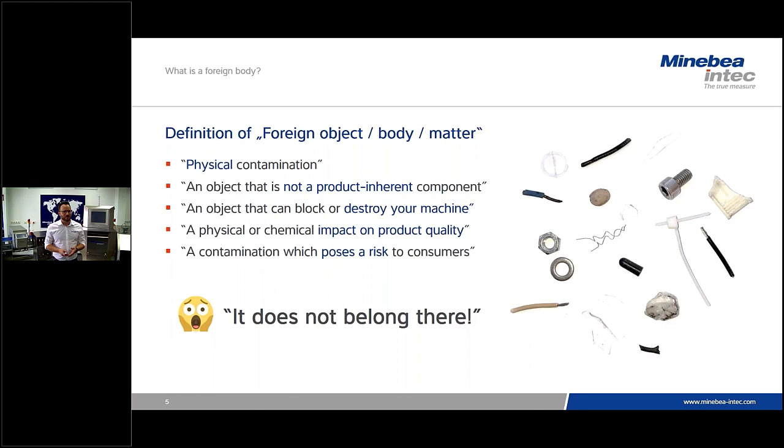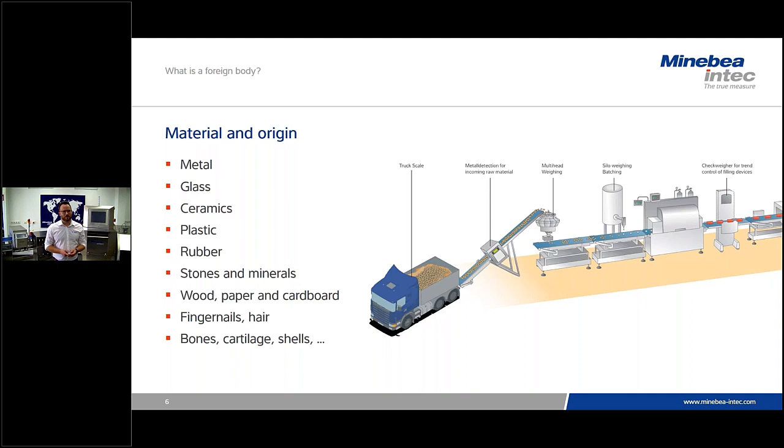In general, we are talking about all kinds of materials here, like metal, plastic, glass, or different kinds of ceramics, stone, or minerals. A lot of these are connected to inadvertent contaminations where personnel lose something like a pen or parts of equipment such as bolts, or remains of maintenance such as cut wires or welding material end up in the product finally. Very often also external matter like bones, seeds, or shells are defined as foreign bodies as well, depending on the customer, on the definition of the product, and finally its impact on quality.

The permitted dimensions of such objects are usually defined by our customers. This table is an example from one URS of a big supermarket chain. As you can see, their definition is not only based on the material they expect to be found, but also on the height of the product above the conveyor. This is an example for metal detection.

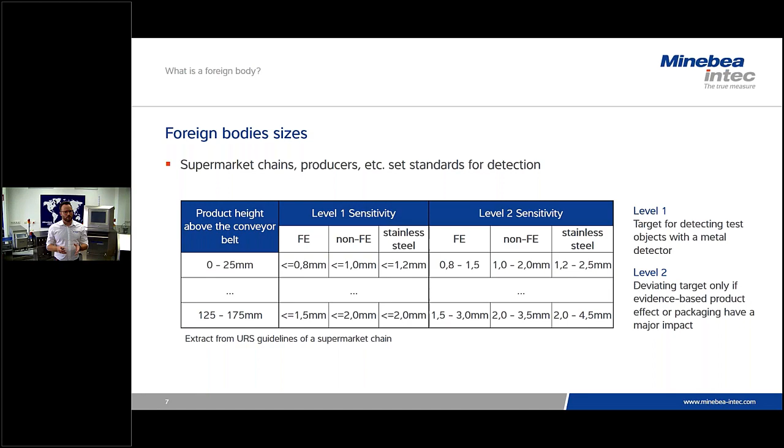For hard cases, they allow a special Level 2 sensitivity with increased object dimensions. You see this in the bottom right corner, up to 4.5 millimeters. They are also aware of the so-called product effect in metal detection, which I will come to a bit later, and its impact on sensitivity. So it's always up to the customer to define this, and later in the technology section we'll talk about the product effect again.

In case of food production, the producer is obliged to follow the so-called HACCP concept, the hazard analysis and critical control points. This includes an analysis of potential inlets for foreign bodies and the decision of critical control points to detect and eliminate these.

I'd like to mention that this is not only valid for food. Other examples are the tire industry, where it's very important to detect foreign bodies in the raw material to prevent tires from bursting afterwards, or protecting sawmills by inspecting incoming trees for nails. There are many examples outside the food industry where inspection for foreign bodies is also a matter of quality and safety. Mostly this is referred to as machine protection.

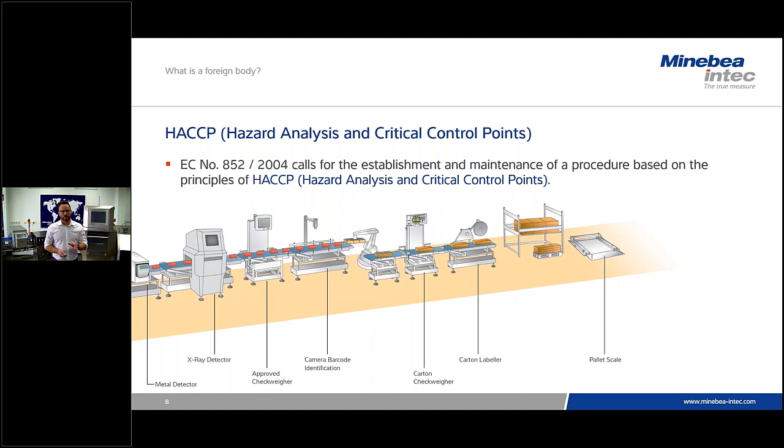Of course, food production in general also increased year by year, and the tracking of recalls became better. But this also means that with media nowadays, consumers are far more aware of these risks, and the impact to a brand has become even more significant.

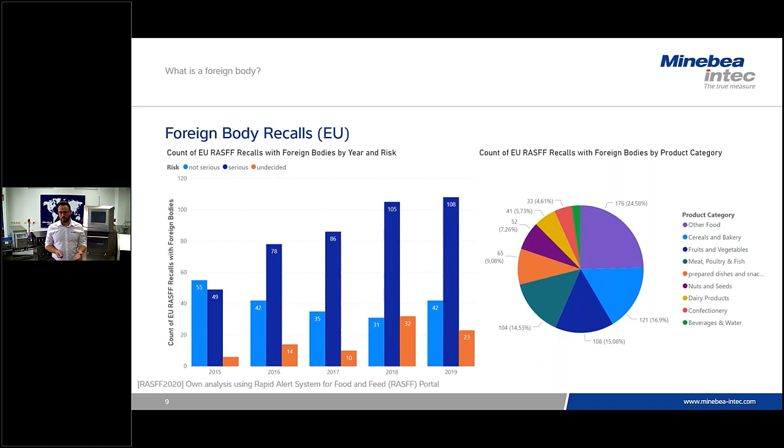So how do we now get rid of these foreign objects?

First of all, foreign bodies can be found manually, but obviously this takes a lot of manpower. Sieves and magnets are a very reliable method, but not applicable for packaged food, only for incoming bulk material. Where sieves are limited by size, magnets can only filter out ferromagnetic metals.

Below that, I would say, are technologies specific to certain applications, and most of them, like spectral imaging, ultrasound, or terahertz imaging, are quite limited, especially by penetration depth or resolution, which is why I don't count them as state of the art in foreign body detection. The really leading technologies are metal detectors and X-ray systems.

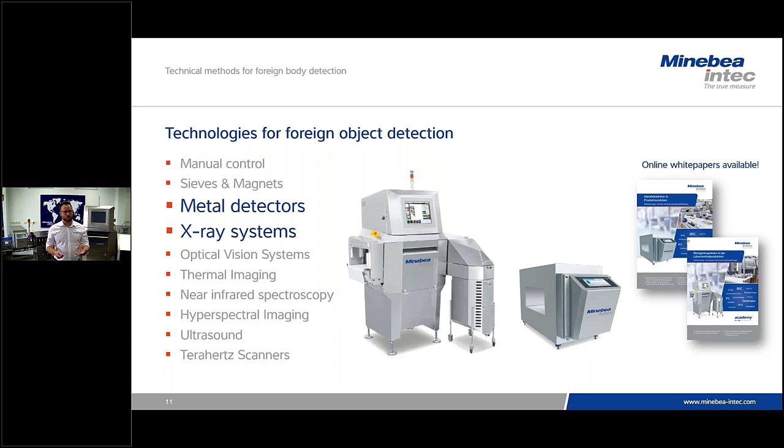I don't want to go too much into the detail of the technology itself today. If you're interested, please check our online white papers. I will just give a brief introduction to the technology in general.

So how does a metal detector find metal? A typical metal detector is based on a transmitter and a receiver coil. The receiver coil has two windings symmetrically installed relative to the transmitter, and between those we generate a balanced electromagnetic field. If a clean product goes through this metal detector, its conductivity produces a more or less noticeable change in the field, which is measured and saved.

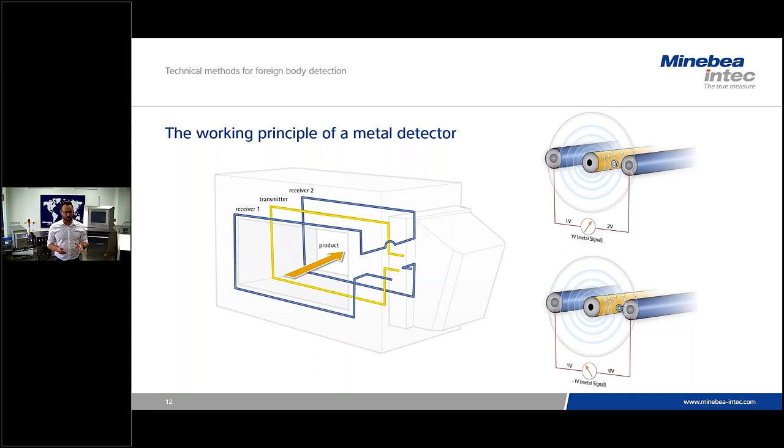You could say the effect of this product in its clean state is the product effect. If there is metal in the moving product, like a nut, for example, this will additionally impact the field even more, and the detector will react to this. Afterwards, using conveyors, we can then reject the products from the line.

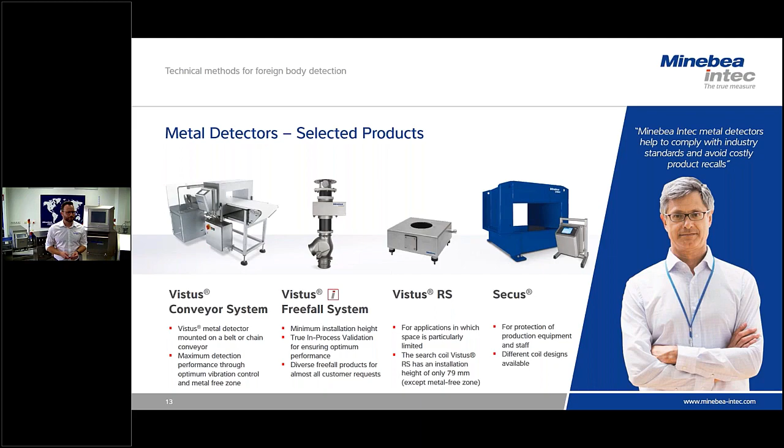So now let's talk about X-ray. What is the working principle of X-ray inspection? Most of you know this maybe from medicine, but here it's a bit different.

We have an X-ray emitting source sending the beam through a moving product on the belt. Below the belt there is a detector sensing the beam which was influenced by the product. This way the absorption is used to generate a grayscale image of the product.

You could say the higher the density of the material, the darker the picture gets. It is similar to medicine, but the difference is that we take it line by line while the product is moving. In medicine, usually when you go to the doctor, the full picture is captured at once.

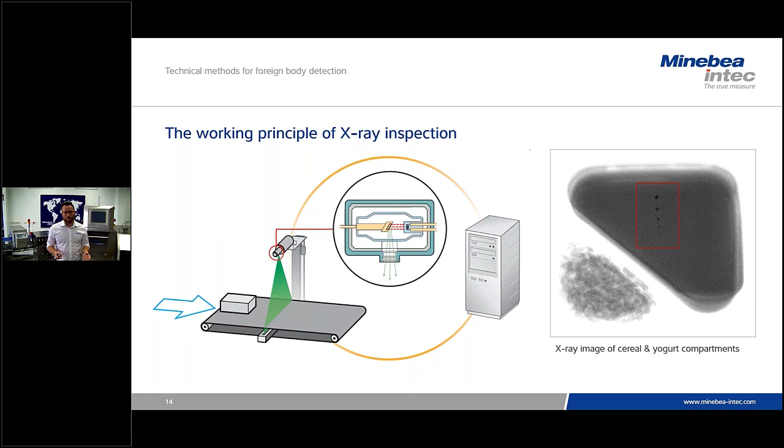Metal parts become visible because of their high density, and the product can be rejected. This here on the right is, for example, a yogurt with cereals in an extra compartment. You can see these metal spheres, hopefully, in the red box. Obviously, you would also see if there is something missing in the compartments, but more on this later.

So which kind of materials can we actually work with here? In X-ray as well as metal detection, we can detect ferromagnetic metals and non-ferromagnetic metals like aluminium and stainless steel. In addition, for X-ray, there is glass - glass-in-glass detection is a typical term here. We can also detect stones and minerals, ceramics, and some plastics.

There is a rough rule: as soon as the material sinks into water, it will probably also be detected by the X-ray.

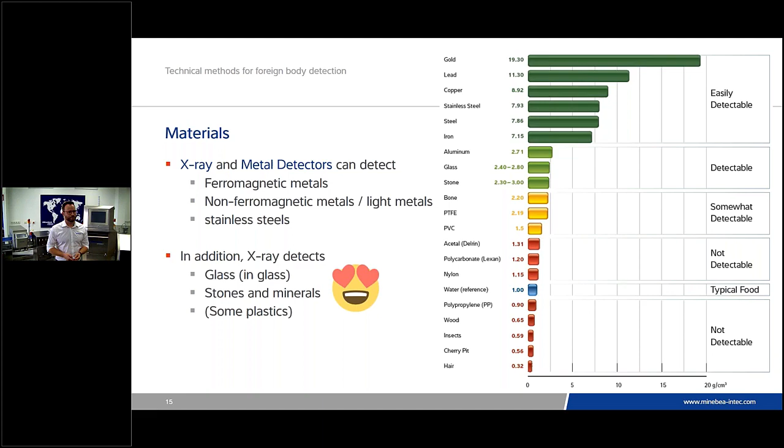At Intec, we offer a wide range of X-ray systems, starting from the most compact entry version, the so-called Dylight, over this one here on the left, to the flexible Dymond series, actually behind me here, up to the side shooter machines for upright containers.

Why side shooters? It can happen that foreign bodies hide next to walls or bottoms in cans and bottles. It's always better to look from the side through upright containers, also because of the way they are transported over chains. To eliminate perspective uncertainties, the side shooters can also be equipped with an additional X-ray beam to have a different angle.

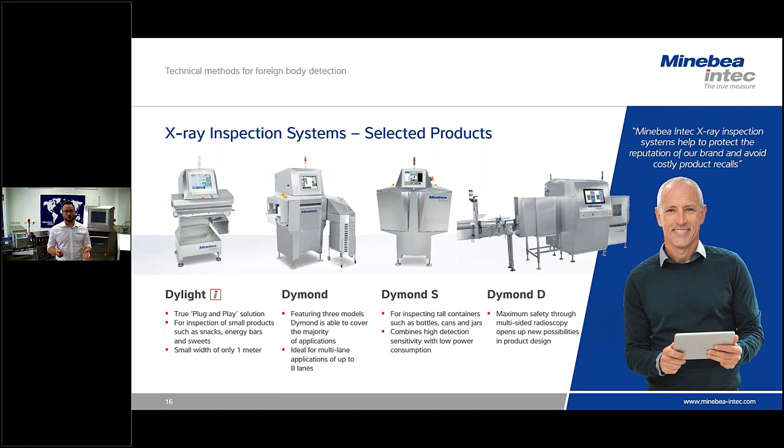This becomes very important also for glass-in-glass inspection. If you think about baby food - being a father of two children myself, I don't want to imagine feeding glass splinters to my child, or even finding metal in a nicely shaped gin bottle. This would be even more dramatic, I must say.

This is definitely not yet proof of the success of X-ray in the industry, but we can state that glass and plastic are to be considered equally to metal in the risk analysis of HACCP in food production.

But of course every technology has its difficulties, and it's important to understand and be aware of these. I'm very confident to say that metal detectors and X-ray systems are very reliable technologies, especially the metal detectors - we have products running for 20 years and more without any failures. But for the installation, it is important to take care of a few rules.

You need to have a very static ground. There should be no vibrations. We don't want to have any electrical interferences, so the electrical system should be analyzed for that and checked if problems come up.

One thing which sometimes leads to problems is one-sided heating. As I explained before, it is a symmetrically balanced system, so a metal detector should not be close to a window or outside without any sun protection.

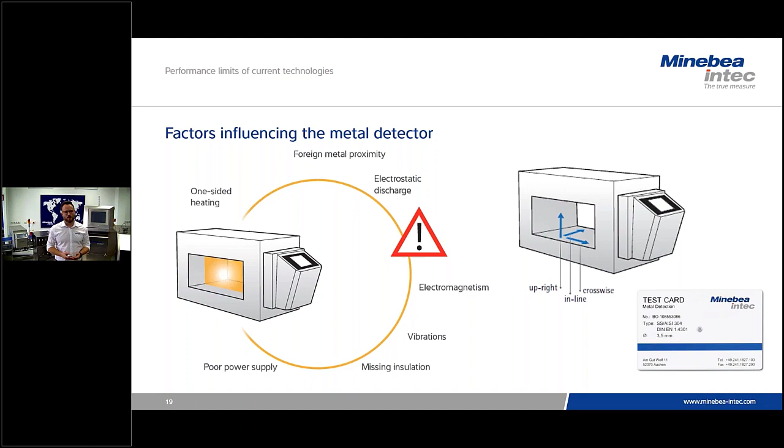In any way, such a sensor has to be calibrated regularly, as any kind of sensor we have. We provide a bunch of different tools for this: test cards, spheres, sticks, and these kinds of things to make it easy to do these regular calibrations.

I want to come back to the product effect, which I mentioned before. This is not really a problem of the metal detector itself, but it's part of the struggle to reach the highest sensitivity.

If you just imagine some dry salt going through a metal detector, you will not see any signal. If you take clean distilled water, you will also not have any signal. But as soon as you put the salt into the water and mix it, you get a highly conductive liquid, and you will have a strong signal in the metal detector.

But don't worry - in this case we have the Vistus, which is based on multi-frequency technology. The multi-frequency enables us to teach and learn different kinds of products with different product effects. The influence of the product effect is minimized in order to reach the highest production sensitivity in the end.

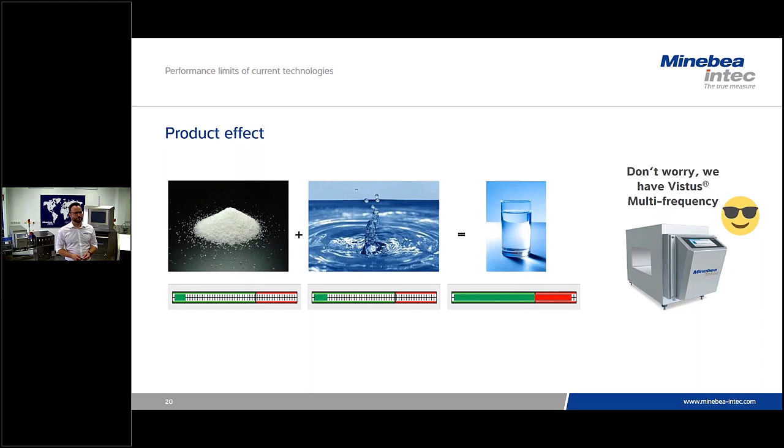So you can see here that most of the influence factors for the X-ray are on the product side. X-ray is not really influenced by the environmental conditions as much as metal detectors are. Sometimes, if it comes to very noisy products like cereals or fruit cubes, here there's an example on the bottom left, the sensitivity might suffer from this, especially when there are changes and the product itself is moving and changing sometimes.

One thing to mention is the atomic mass. Before I said it was about the density, but sometimes when you have stone, glass, and polymers, it gets very tricky because the compositions are actually compositions of several materials. It is then not only the density but also the atomic mass of the composites influencing the result in the end. In any way, product tests are essential to check the sensitivity in combination with the current product.

This is valid for metal detector as well as for the X-ray. But here, can we really test all stone compositions which are expected from a field, for example, in a bag of potatoes? Obviously not. So there is still this little uncertainty left nowadays.

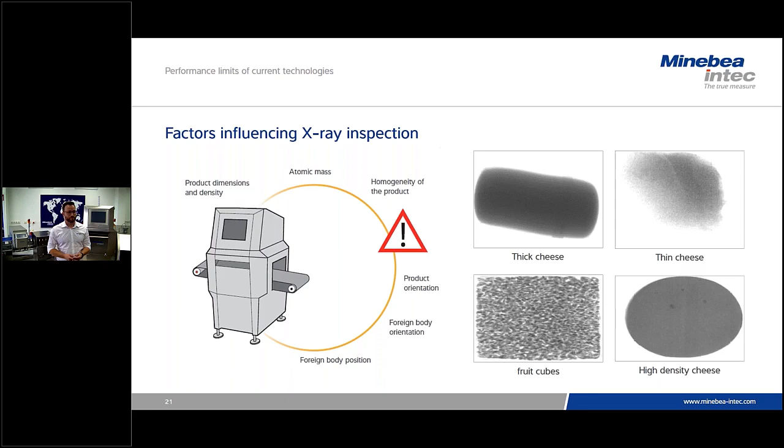So once evaluated by product tests, both X-ray and metal detectors are definitely very reliable solutions for the job of foreign body detection. It is important to decide already in the beginning what the need is and might be in the future products. So let's say if you have a conveyor or if you need a free fall application, this is usually a clear indication to have a metal detector.

If you have a metallic foil packaging, this is usually going in the direction of X-ray. As I said, glass, stones, and other non-metals are definitely, if this is important, going in the direction of X-ray as well. And the product effect, especially changes in the conductivity of the product during production, might also be a pro for the X-ray in this case.

Nevertheless, we support our customers with our professionals in this process to find the right solution, and the right solution doesn't always mean selling the most expensive unit. Metal detectors definitely are very reliable and usually a very good solution for most of our customers.

One thing we didn't talk about yet is the so-called product handling and problems which can come with this. Even with a perfect detector, we need to make sure that the product is properly rejected. So how can we actually monitor the inspection system itself? Obviously, by using even more technology.

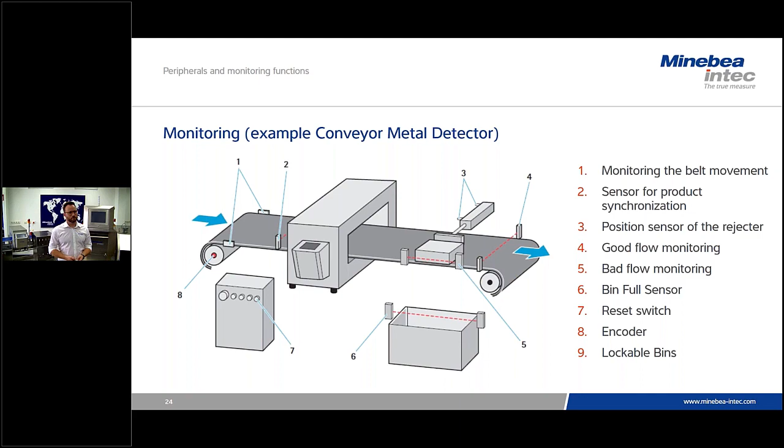So now that we have hopefully understood the meaning of foreign bodies in general and the technology to detect and reject them, let's have a look at the benefits.

I was curious myself to understand what recall means for a company. I found this survey from Ernst & Young together with many companies of the Consumer Brand Association in the US, and the authors state that more than 50% of the companies suffer from a recall costing more than $10 million.

Next, we have the protection of consumers and the environment. As I said before, around up to 5% of foreign bodies found can cause severe injuries. The definition is: hard and sharp objects larger than 7 millimeters are considered physical hazards in food. If smaller than 7 millimeters, they are considered a hazard only for risk groups like infants or older people.

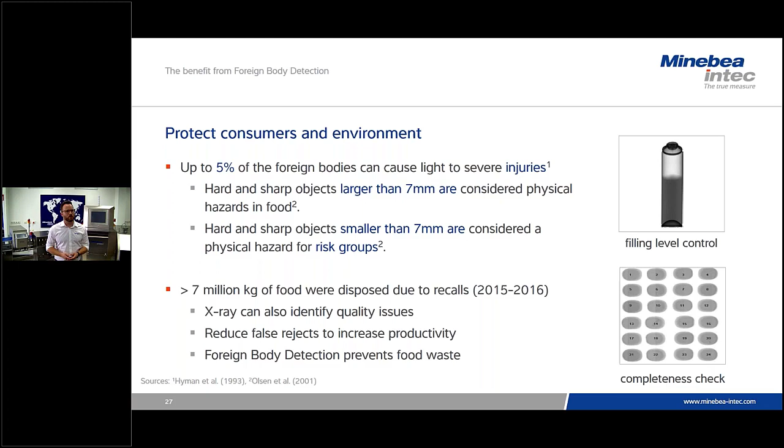In this case, we have the false rejects, which can be perfectly set by the multi-frequency Vistus metal detectors. So in the end, we can also prevent some food waste here, and we will protect the environment with these devices.

Sometimes it can be a bit annoying, but there are a lot of industry standards. On one side, you have region-specific standards like IFS or Canada GAP, and on the other side, you have customers who directly give you their own standards they expect. They will definitely ask for a metal detector or foreign body inspection, so you can be compliant with these standards.

And lastly, you can increase your productivity with this. At the beginning of the line, you can protect your equipment and prevent downtime. At the end of line, the metal detector or X-ray is usually at the very end, so the whole production already runs through. Through the foreign body inspection and quality functions, you also get insight into the quality of your whole production, which can be used to increase productivity.

Think about vertical and horizontal communication between the machines—we have standard interfaces for this, as well as software, like SPC@Enterprise, to collect statistical data in the best way.

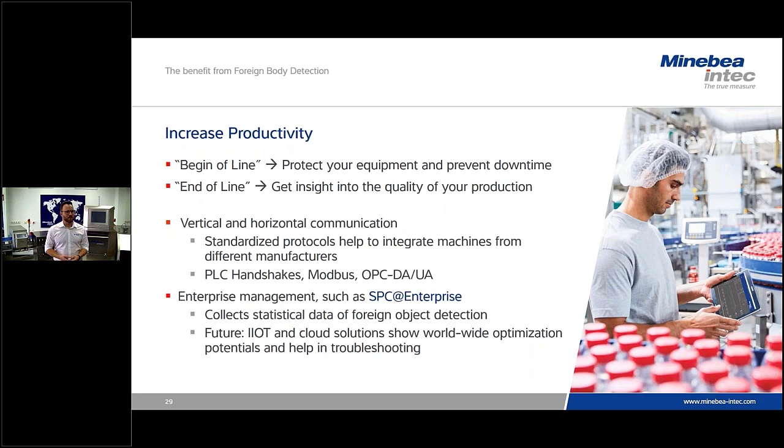So let me summarize today's learnings: how to actually benefit from foreign body detection in your production. First, get in contact with us—we have a lot of professionals, highly committed people who like to help you prevent problems with foreign bodies. As we heard, metal detectors are very good for highest metal sensitivity.

An X-ray usually comes into play where there is metallic packaging, or when we search for non-metal foreign bodies. Monitoring can also help increase the productivity of the whole line, preventing downtime and other problems. And I think we can reduce some product waste with this. Also, I always see foreign body detection as a kind of insurance for a business, which helps protect your brand in the end.

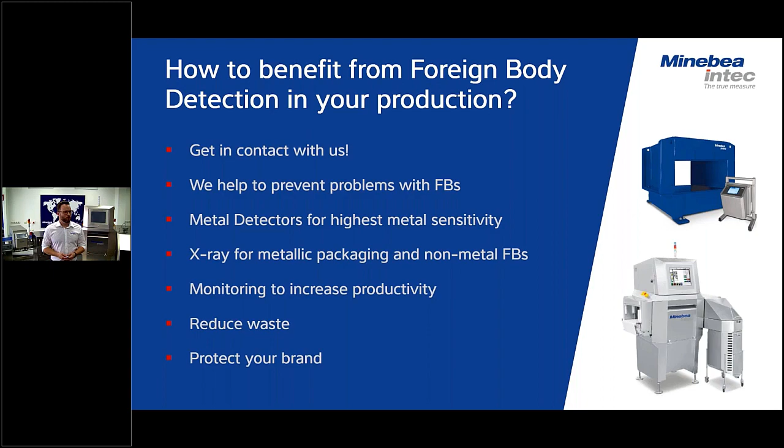And hopefully, in terms of safety, if you have a proper foreign body inspection installed, I think in the end we can make daily life safer.

Thank you very much for your attention, and I'm open for some questions.

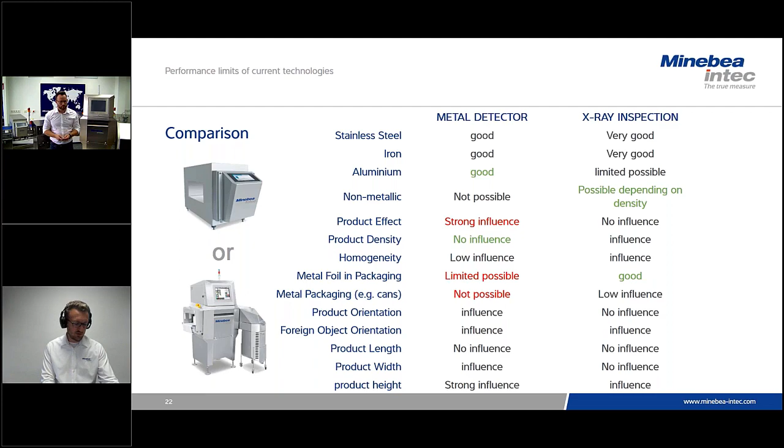One question which I received was, you mentioned the X-ray technology, and people know X-ray from medicine, for example, when they go to the doctor. And the question basically is asking, does the X-ray system in any way influence the produced products? I guess the customer is afraid that the X-ray radiation might change the shape, or not the shape, but the structure of the product, or maybe its safety.

Okay, yeah, I think it's a topic which has existed for a long time already. We didn't do any kind of tests where we tested the cells in the end and these kinds of things, but to the best of my knowledge, there is definitely no influence of the X-ray, the electromagnetic waves, on the food, so that it has any kind of negative impact on the human body later.

We have to differentiate between the different kinds of radiation we are talking about. X-ray is not the same as alpha, beta, gamma radiation. This is a completely different thing. So I would say X-ray is as safe as the metal detector. We build our systems in a way that there is just a very, very small amount of X-ray coming out of the system, which will be not more than the radiation you get every year from the universe, from the sky, let's say.